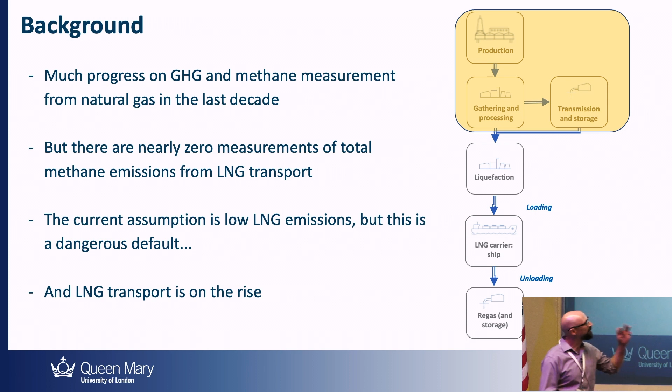There are nearly zero measurements of methane emissions from LNG ships. We've done a reasonable job on the upstream, midstream side. There are a couple of measurements around LNG liquefaction, regas, and storage. But there's really hardly anything when we're talking about LNG transport, including the loading, the unloading, and the actual transport phase. I wanted to do a sort of traffic light system, but I realized there weren't really any green areas of the LNG supply chain yet, just thinking from a global perspective.

The really challenging thing from my side was that the assumption has always been for LNG systems that we have very low emissions. When you go in with that assumption of very low emissions, it's difficult to garner support to go out and really spend lots of money studying these things. But it's not until you actually go and study these things that you realize it's not quite so simple as this. It's a dangerous default.

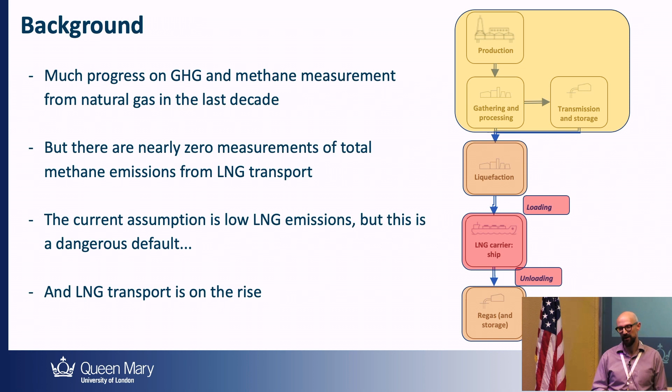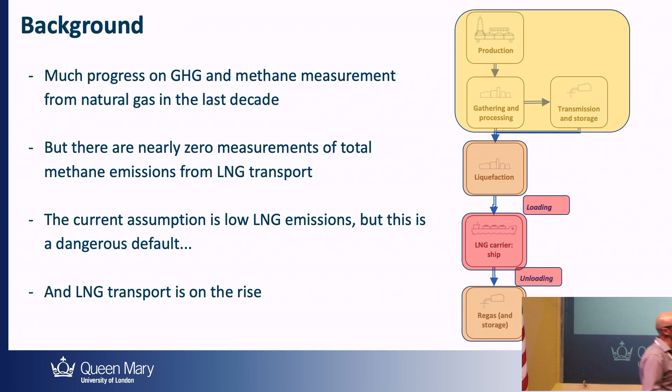At the same time, as we've heard, particularly yesterday, LNG is on the rise. We're seeing way more transport and year-on-year growth in LNG. So it's becoming much more important to really understand what these emissions characteristics are, because if you do see substantial emissions on the shipping side, it's going to ruin your credentials for the whole supply chain. So this is the topic of what we're talking about today: the transport side of things.

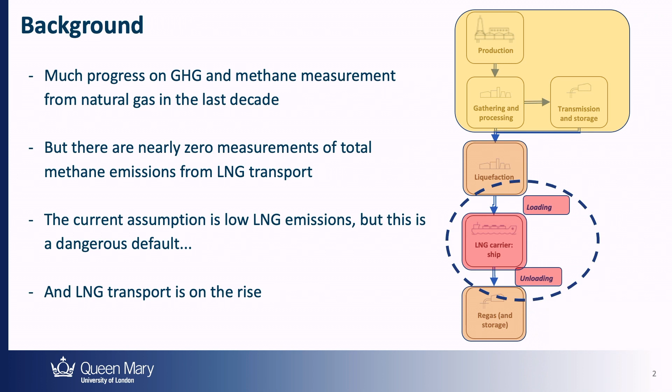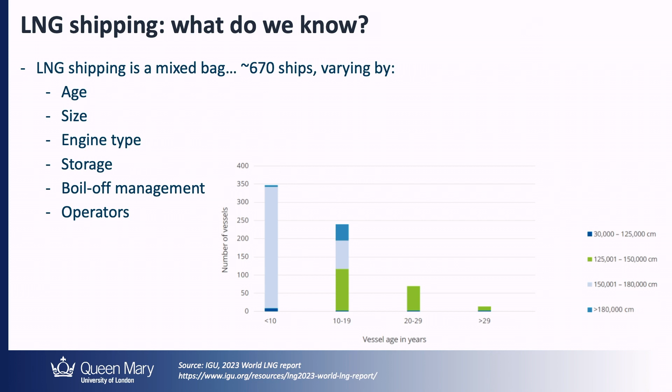In terms of what we currently know, the honest answer is not that much. LNG shipping is a mixed bag. We currently have around 670 ships in operation at the moment - these are LNG carrier ships - and they are quite variable across different technical characteristics.

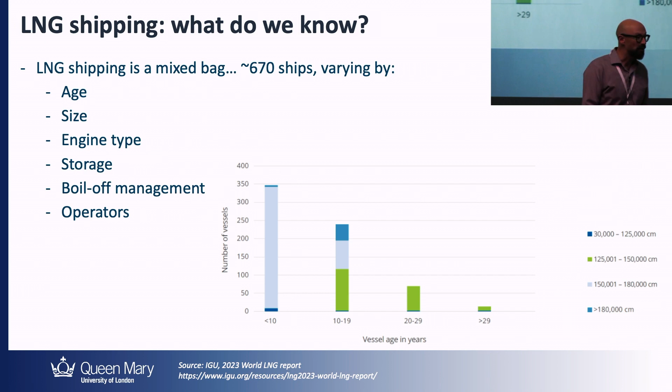So I've robbed somebody else's graph here. This is the number of ships we've got across a different age range - we've got quite a good distribution, although fortunately there's a really large contingent of younger ships. Also, cubic meter capacity, so the size of ships, is quite varied. And what we think is all-important: the types of engines used in LNG ships is very different across the different ships. We've got lots of different engine technologies that we know are going to emit different types of emission profiles.

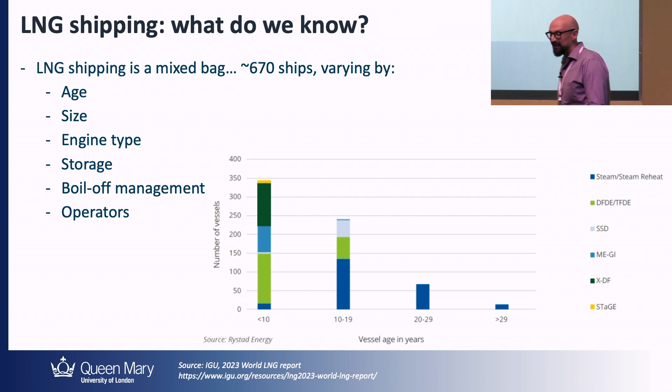So what do we know? Not that much, but we know that there's a lot of variation in the technologies and lots of different operators, so we know that there's likely to be some variation here.

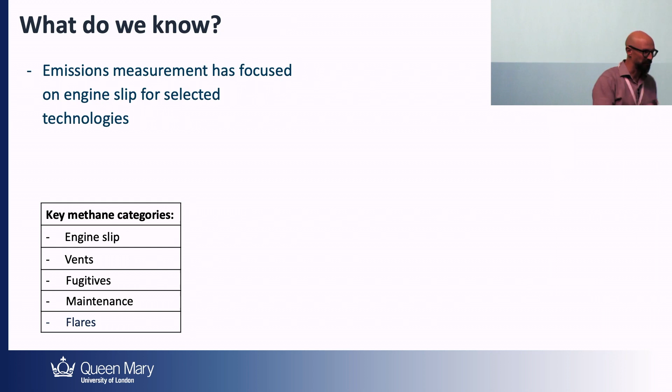So what we did a few years ago was start by thinking about what the potential emission sources are. We looked at methane and the key emission sources, the standard ones: vents, fugitives, flares, maintenance, and also engine slip, which is part of the incomplete combustion process.

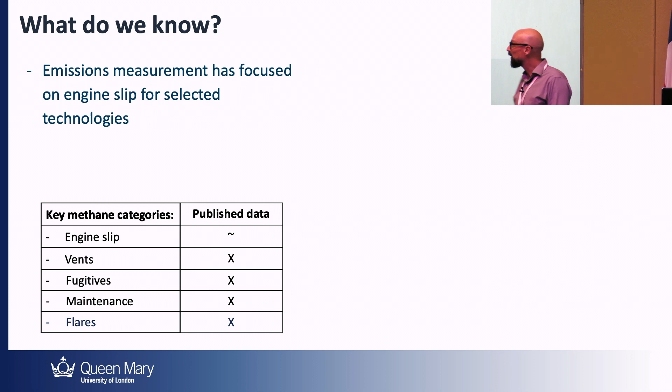If we look at published data, there's a little bit of data on engine slip emissions, which is why we know different engine technologies are really important to think about. But there's basically nothing on any of the other emission sources, so that's one thing we really have to address.

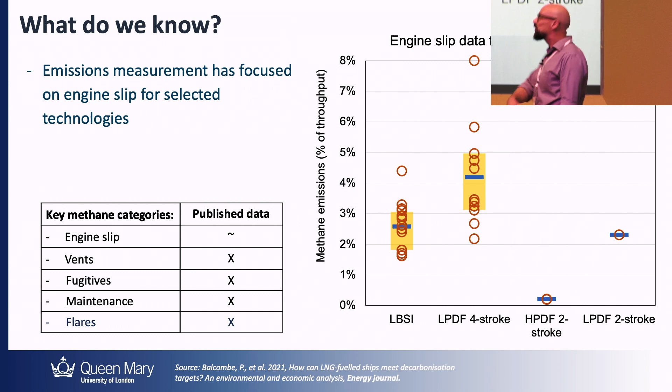For the data we do have, this is a copy from a publication we did a couple of years ago showing engine slip data for different types of engines. On the Y axis we've got the methane emissions intensity, the percentage of throughput, across 4 different engine categories.

I don't need to explain the specific acronyms or go into detail, but just know there are different engine categories, and they have quite different emission profiles from what we know currently.

The circles are individual measurements. Actually, if we're honest, most of these are test engine measurements or lab tests, so often they're not in-situ, real life, in-operation measurements, which is an issue.

The next thing is that these last two, particularly the last one, the LPDF - low pressure dual fuel two-stroke - is a really popular engine for LNG carriers now. Up until very recently, there were basically no real life measurements of this engine in operation.

So we thought the emissions would be about 2.5% slip - meaning 2.5% of what you put through the engine slips out. But we need to corroborate that.

The other thing we never really talk about is that we focus on the main engines. But when we think about these big LNG carrier ships, you've got a couple of main engines and also a set of auxiliary or generator engines generating the electricity - that's typically how it works. There's really nothing on these generator engines, and they produce a lot of power.

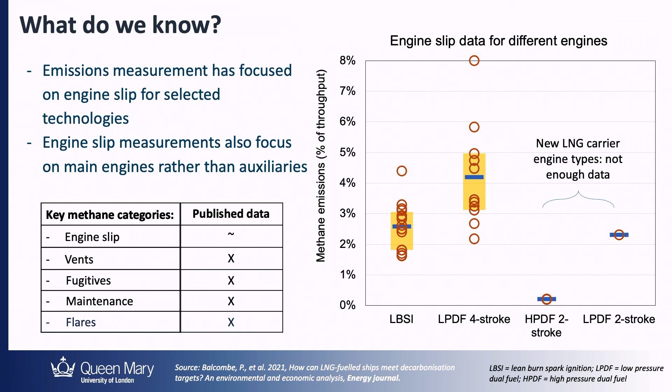We've got a little bit of an issue with the text, so I can tell you if you can't read it. This is a study we did in 2021 and published in 2022, our first ship study. The idea was to get on board a ship and conduct actual measurements of methane emissions across all of the different potential emission sources.

We did a full round trip, trying to understand what the emissions profile might be while filling the vessel, while loading, while actually doing the cargo-laden transport, what happens when it unloads, and also the ballast return journey - really trying to get a characterization of the whole round trip.

This is really a first of a kind - we don't think anybody had done a total emissions measurement campaign on an LNG ship before. There's a good reason for that: it's because it's quite hard. It was a really tricky thing to do, cost quite a lot of money, and logistically it was challenging.

I think Fiji mentioned we had a small issue at the start, which I could probably blame myself for. We did this around the time of COVID, and I wasn't allowed to travel from the UK directly to the US to board the ship, so I had to spend 2 weeks somewhere else. I chose Cancun, which I'm sure you can sympathize with.

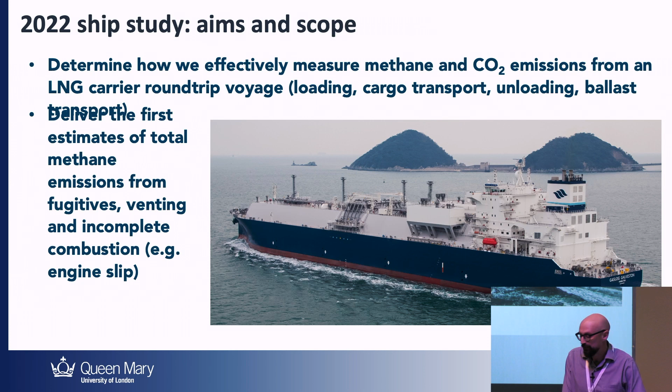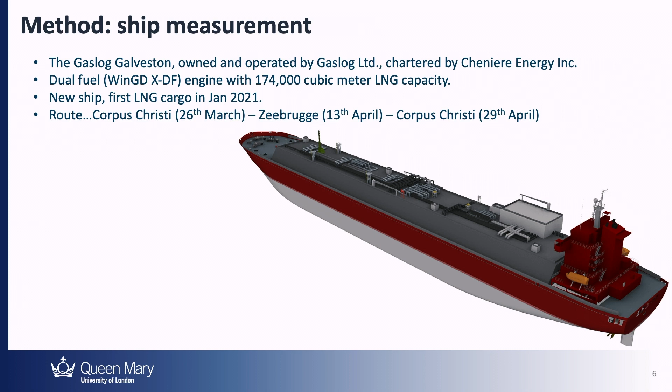Owned and operated by Gaslog, chartered by Cheniere. It's actually a fairly new ship at the time, so this was only its second voyage. It was a new ship with very new technologies, which was an interesting start. It had one of these engine types that is a low pressure dual fuel two-stroke that we didn't really know anything about in terms of real operational data.

The first cargo was in January. We boarded it at the end of March, and we spent a month on the ship, a whole round trip. There were 3 of us conducting the measurements: myself from Queen Mary plus colleagues from SLR who did a great job.

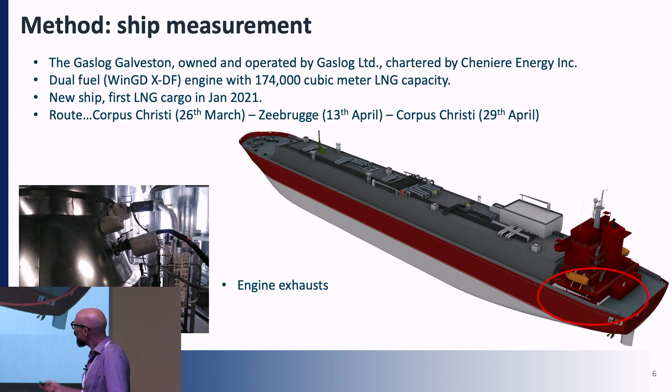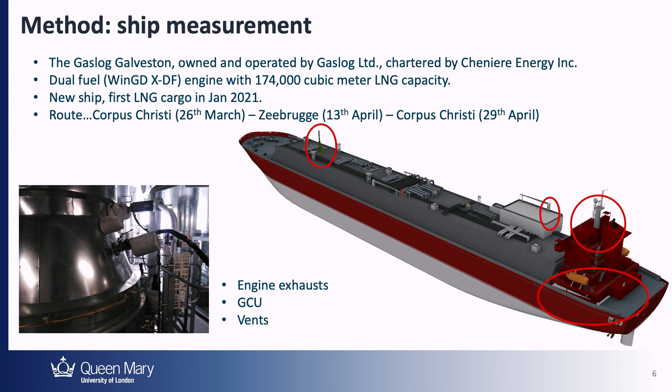We tried to look at every different source of emission. We looked at engine exhausts - on this ship there were 6 engines, so 2 main engines and 4 generators. We connected up what's called an FTIR system to do stack emissions monitoring on each of those. We looked at the GCU, which is basically the flare for the ship, the gas combustion unit. We also looked at vents - there were 5 vents on the ship - and we did fugitive emission surveys as well.

We were walking around every day, scouting around for fugitives. We probably didn't need to go every day, but whilst you're on the ship, there's not a lot else you can do, so we did a lot of fugitive emission surveys.

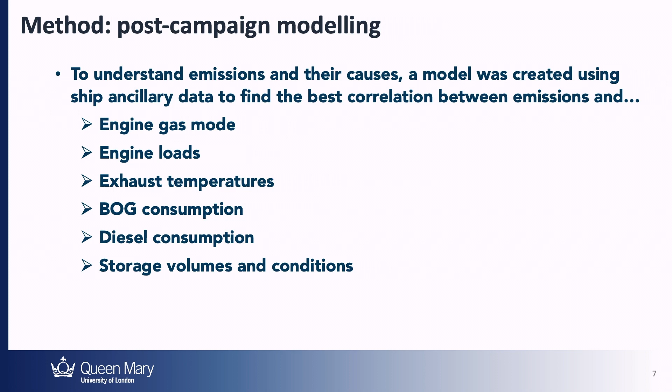That's how we did it. As well as collecting the methane emissions data, we thought it was going to be really important to understand what was going on the ship at the same time. So we collected as much information as possible, not least having interviews and talking to the operators all the time, but also collecting minutely data on the engine gas mode, the loads, the temperatures, the boil-off gas - BOG is boil-off gas, which is fairly important when thinking about methane emissions - the diesel fuel consumption, as well as lots of other stuff. We collected loads of this data so that we could plug it into our models to really understand why we see the variations in emissions over time.

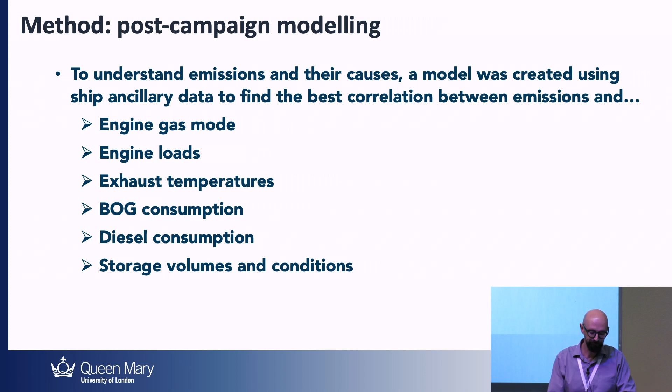In terms of the results, I'll give you a really brief overview. I guess the numbers don't particularly matter - it's more the proportions that you might be interested in.

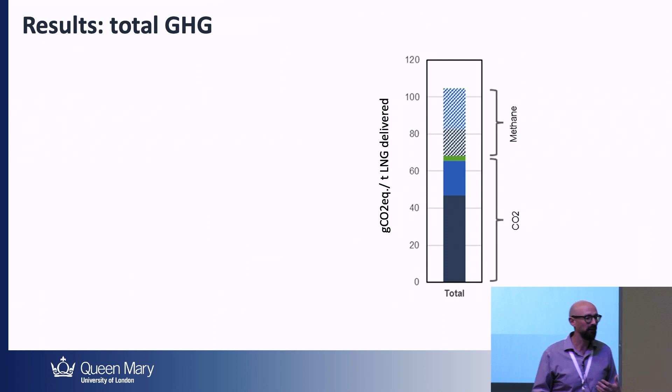We looked at both CO2 and methane emissions - the methane component was an important part. We express the results here as grams of CO2 equivalent per ton, but we also look at just the methane emissions. Perhaps for this audience, what's important is that we estimated the methane emissions were about 0.1% of the LNG that was transported and delivered. So the methane intensity overall was about 0.1% of what was delivered.

The other interesting stuff to talk about is where the emissions chiefly came from. We saw very, very little emissions associated with our vents and fugitives. Perhaps it was fairly clear we were going to not see a lot of fugitive emissions because it was quite a new ship, and this may vary across different ships.

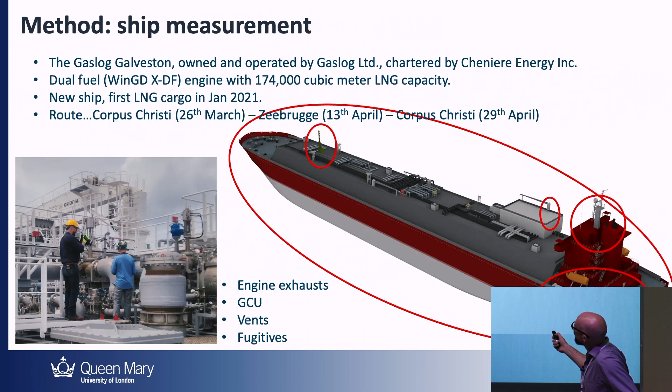What was perhaps most interesting to us was the contribution from the generator engines as well as the main engines. The hashed stuff at the top is the methane emissions from the main engines and the generators. Bearing in mind, the generator engines were a lot smaller than the main engines - they were a lot smaller in terms of their power - but they contributed more emissions because they were much more slippy.

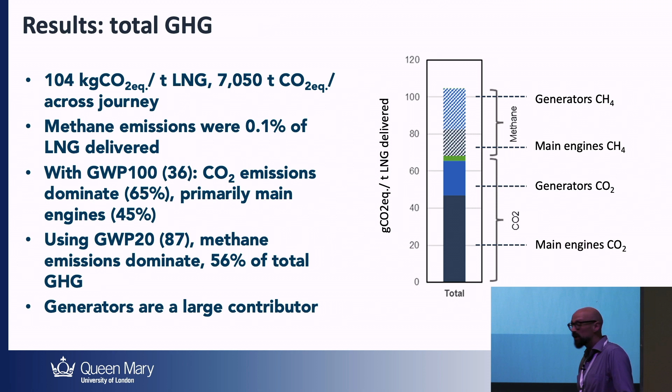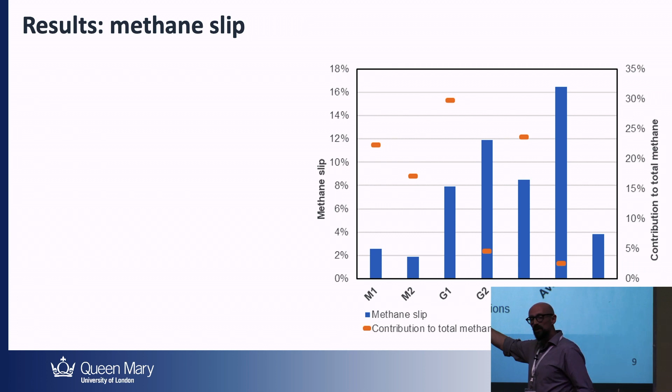So we looked a lot at the methane slip and how to characterize the methane slip across the different engines. There were 6 engines: M1, M2 the main engines, and G1 to 4 the generators. The methane slip rates - how much of the methane slipped through uncombusted compared to what you put in - varied quite substantially across the engines. Main engine 1 and 2 were identical, and generators 1 to 4 were pretty much identical.

I think actually 2 and 3 were the same, and 1 and 4 were the same. But we saw very different emission profiles when you look at the averages. Slip rates between 2% up to 16%. These are averages across the whole journey, so you actually saw quite a lot more variation within that.

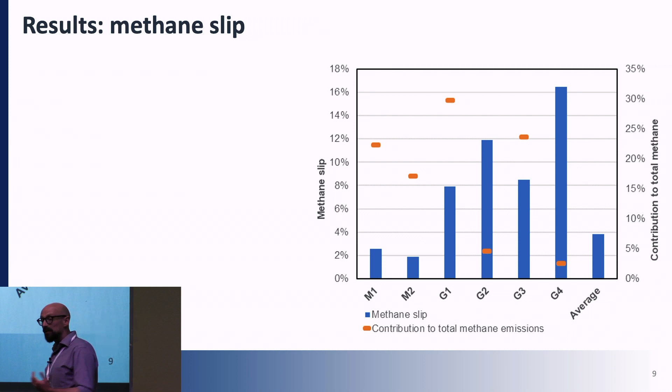So it's not an inconsiderable amount. There we go. So I've written here, the power rating of the main engines were about 11 megawatts and 3 to 4 megawatts for the generators. But the slip rates were much higher for the generators.

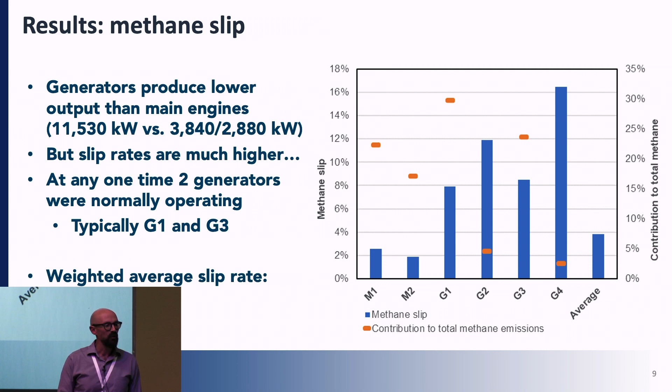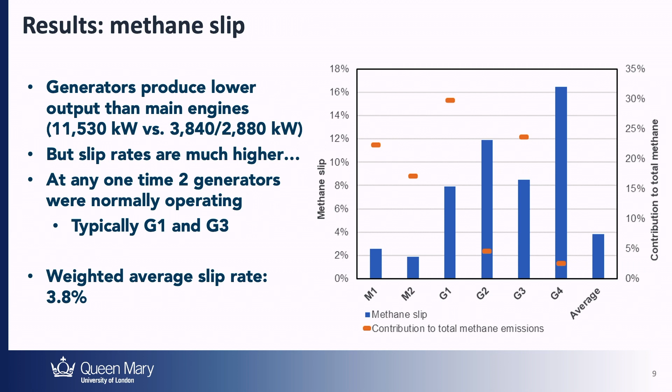You normally only operate the generators two at any one time, right? So they're not all operating at the same time. There's redundancy there to make sure we've got sort of operational effectiveness. And I should say that typically it was generators 1 and 3 that were working most of the time. They had some issues with the other 2, which is why we saw raised slip rates for generators 2 and 4, so 12 and 16%.

And so maybe the most important output from the study was really to look at how the engine slip rate changed over the engine load, so how much you're using the engine.

With the generators, it was a bit of a minefield. We typically saw between about 25 and 75% operation, and below 40% engine load for the generators, you saw really high emission rates. This was something that was quite surprising to us. It perhaps shouldn't have been, because afterwards, when we came back, we asked for the manufacturer's spec, the technical NOx profiles, and I should say that these engines actually performed as they were supposed to perform. They just hadn't been designed to minimize methane slip. So this was actually not outside the normal operation zone of the generator engines. They were just not designed for minimum methane slip, which was a little bit surprising to us. So the main thing here is that at low loads, you've got really high slip rates, and it kind of gives us a fairly substantial opportunity.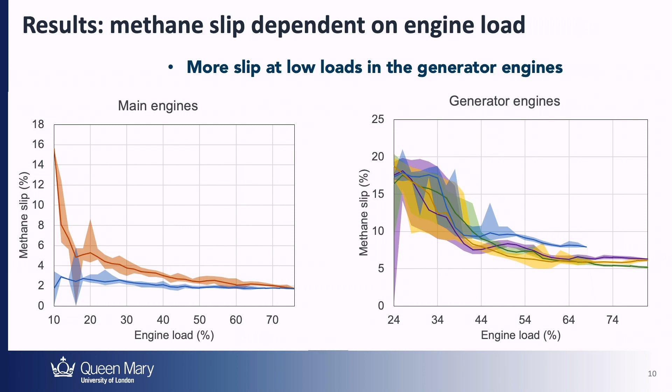Thanks. So just to say, vents and fugitives, really, really low. We looked at all of the routine vents, there's basically no routine vents on the round trip that we saw. The only vents we saw were a couple from maintenance, and then some venting associated with engine mode switching. These are dual fuel engines, so they sometimes use diesel, and most of the time use gas in this case, but they sometimes switch between the two, and when they switch, they often vent out big slugs of methane.

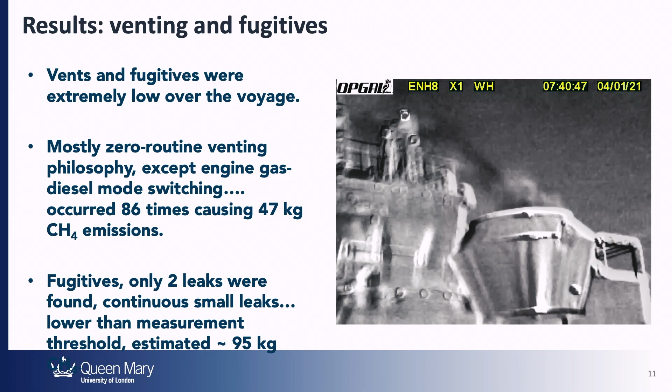And this was one of the vents. Sorry, I've got really dodgy camera skills, so apologies for the bad one. But we saw some quite strong slugs of gas coming out when it switched.

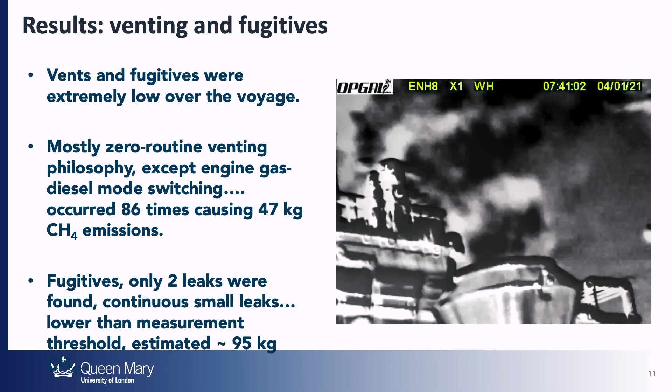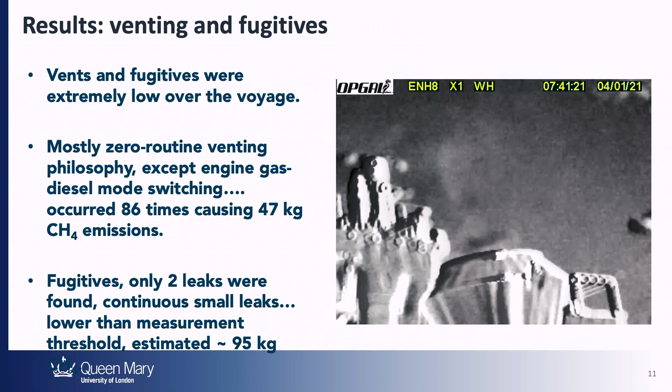The really interesting thing for us was that we didn't realize how much the engines were going to switch. It switched 86 times during our voyage, and the reason they switched was, most of the time, because there was some sort of an upset going on. They also switch when they're at very low loads as well. So that was a learning lesson, but overall, compared to the engine slip, it didn't really register.

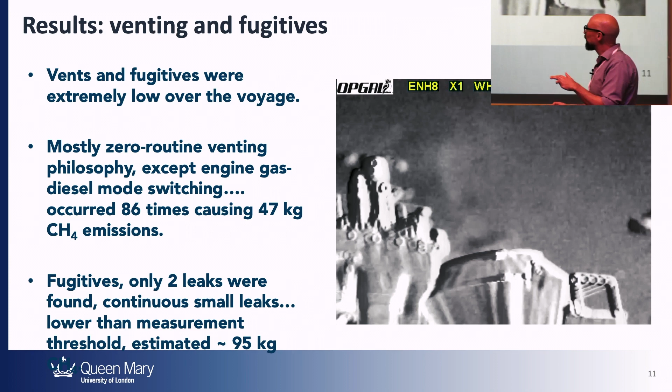And across all of the fugitive surveys that we did, we only found 2 fugitive leaks. Bearing in mind that I was looking at fugitive emissions pretty much every day, we found 2 relatively small leaks across the plant. So it was a bit of a joyless activity, I have to say. So generally really low venting and fugitive emissions. That may not be the case across all ships, particularly older ships or different operators, but this is what we found for this one.

So the key question is how we can reduce emissions from what we've learned, and the most obvious opportunity is thinking about if we can change our engine load profiles to reduce slip. So I've put another graph which looks at what the total greenhouse gas emissions might be with the GWP 100 at different engine loads. The gray bit is the methane contribution.

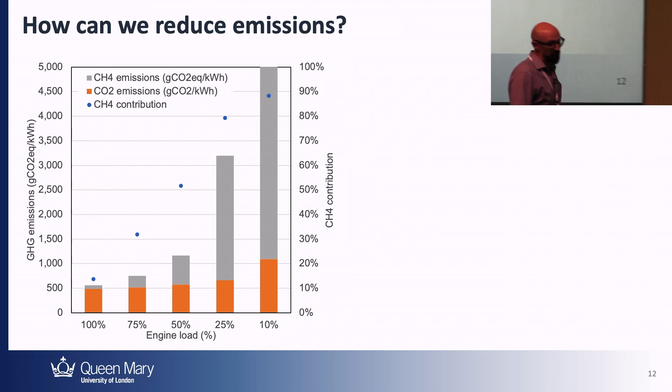And the red bit is the CO2. So normally we were operating the engines around about 40-50%. You can see the methane contribution is around about half there. But if we increase that to 80%, you're nearly halving your greenhouse gas profile. So there's a potential opportunity there, for example, to be operating only one engine at a much higher load, or changing your operational dynamics.

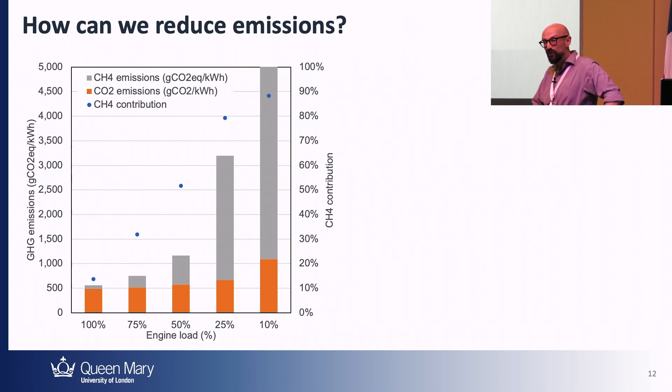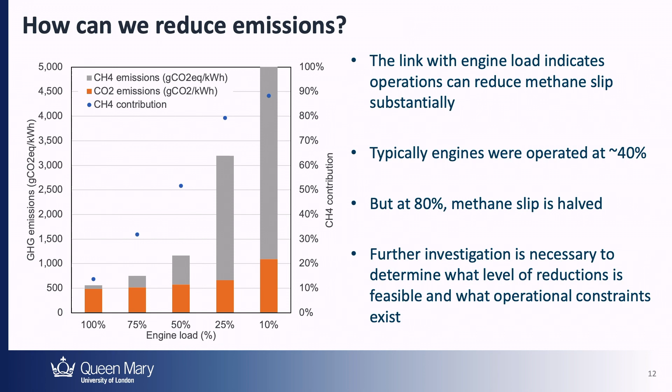Obviously, there are limits to the feasibility. It depends on what the other operational constraints are, right? So there are safety issues, technical issues, operational feasibilities and standard operation procedures. But that's why we really need to talk to the operators to understand what we can do and how we can drive things down. So at 80% load, methane slip is about half from what we were normally working on. We think this is a really good potential to reduce.

So just a couple of conclusions from this, and I really want to talk about next steps, so I'll be super quick here. CO2 emissions were quite a lot lower than what we normally assume of LNG ships, but methane was a little bit higher. So our total average engine slip rate across all the engines was about 3.8%, which is quite high.

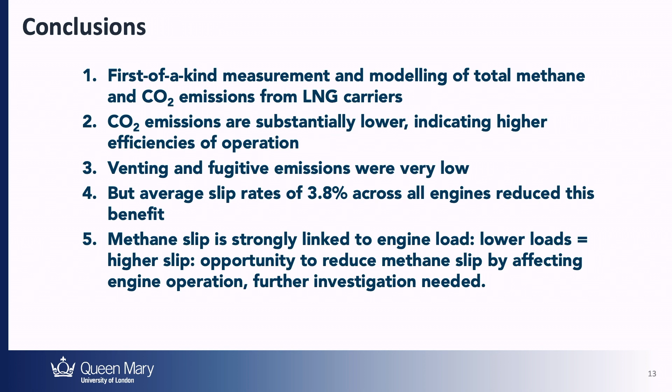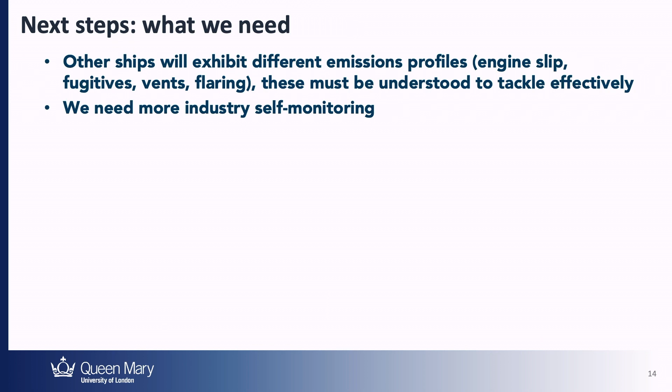What do we need to do next? This is one ship out of 670. We need to look at more ships. We need to cover more ground. But we also really need industry self-monitoring, right? There is nothing stopping everyone from, except money, continuously monitoring engine emissions. We have the technology, we have the commercially available technology to do that.

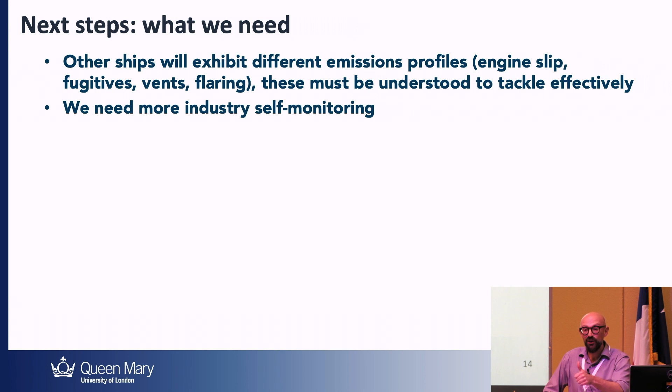And this does need to happen. It is happening in various ships. We've talked to Cheniere lots of times, and many of the chartered ships do include CEMS systems. We need to understand how much is monitored. There's not really a record of how much is monitored, and how good these monitoring systems are, to really judge what information we can glean from it.

But we need to do a bit more research, of course, so we need to get a more representative sample of ship measurements. We need to understand what is monitored and how it's monitored, understand the precision and what we can get out of it, and get a better understanding of what these emissions are and what the levers are that we can pull to drive these down. What I think we also need, and this speaks to the MDL stuff, is a tool for better estimation of ship emissions. And we can only make that tool if we've got some better data to do that.

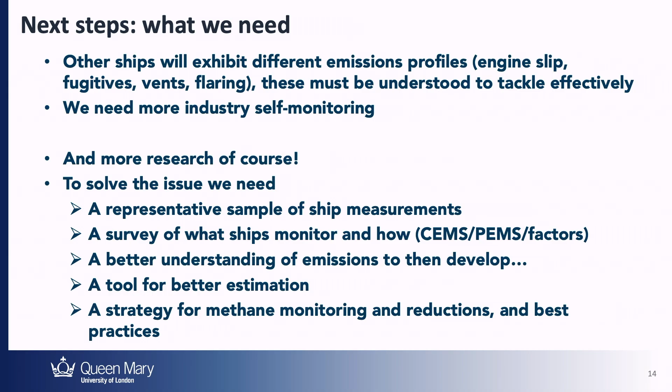So I shall leave it there. Thank you very much.

Comment and a question. First comment is we need a better tool. There's a poster out in the back from Kirsten Rosselot, who's in the audience, describing a basic formulation of a tool.

And one of the things that becomes clear as you construct a tool is that these generators, which have such high slip, are operated preferentially in certain parts of the voyage. Thinking about when the ship is underway, it's mainly the main engines, but once you're maneuvering and undergoing other parts of the ship's activities, you wind up with different loads on the generators versus the main engine.

So would you like to speak to that a little bit? Yeah, absolutely. So the operational profile of all the engines changes depending on where you are in your round trip. When you're loading and unloading, there's much more of a duty on the generators. That might work quite advantageously if you're thinking that engine load increases result in reduced slip. So if you're using them harder, then you'll reduce your slip. Actually that's quite a good one.